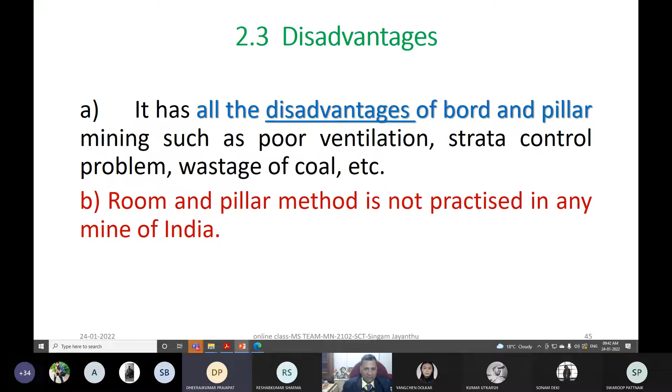So now compared to these, we have reduced OMS and reduced cost of production compared to conventional bord and pillar, as we have seen before. Now coming to the disadvantages: it has all the disadvantages of bord and pillar. We are discussing the room and pillar method, and it has similar poor ventilation because there are so many openings, strata control problems, and wastage of coal in terms of ribs and all. This room and pillar method, of course, is not being practiced anymore.

Now coming to our longwall method, which I appreciated while selecting your topics, my beloved students of underground coal mining, because the future will be only longwall mining, for the simple reason that even if you want to design a pillar, it's supposed to be so big in size that it becomes nothing but a longwall only. Very simple, right?

So this longwall method, in general, you must be knowing from the previous semester, but note it down as we will be discussing more in detail. There are basically two types of longwall mining. In India, with mechanized longwall mining, we only take up the retreat method. Otherwise, there is the advanced method of longwall mining. The case is very simple.

Already regarding this, let me ask—some of you must be knowing the basic difference between the advanced mining method in longwall and retreat longwall mining. Anybody can say in short. I am not asking this as a quiz or question, but it gives me an impression that you know something about it, and then I can explain more.

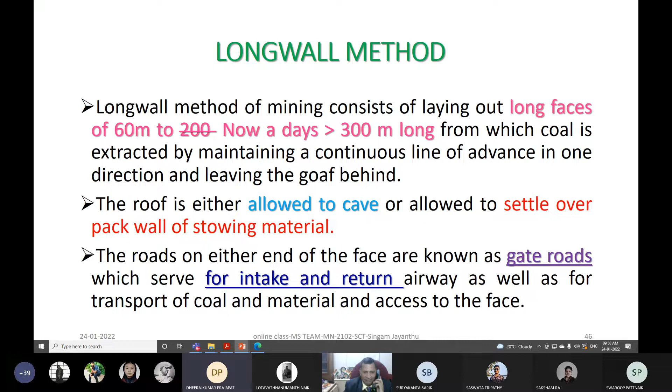Yes sir, you can say... yeah, more? Okay, don't worry. So all your students will be grateful to you who is giving voice - my voice, your phone - in this typical period of online learning teaching process.

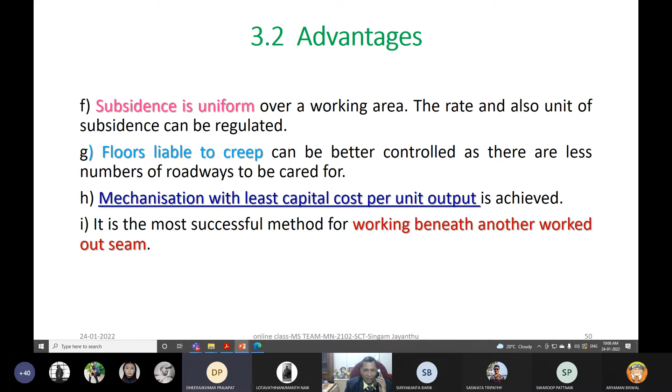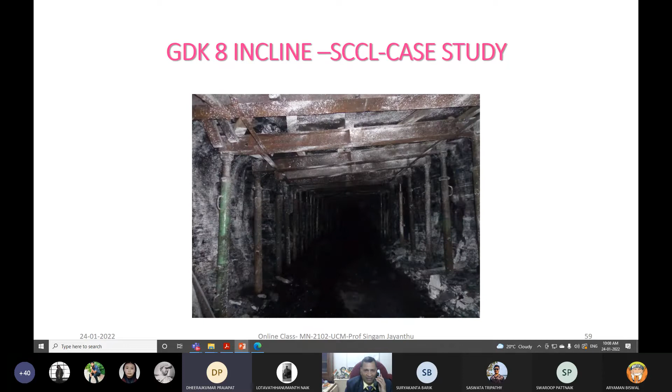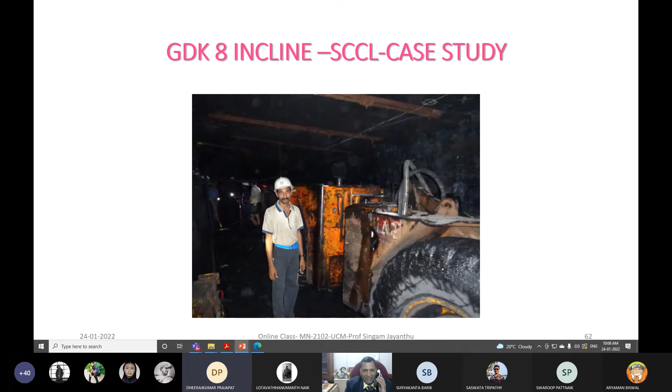We have already seen so many mine videos, and I used to take some more videos inside long wall panels and Bord pillar panels, whether it is GDK incline or blasting gallery, and how this is decided based on the performance of different panels with different machinery, LHDs, remote control LHDs, or conventional SDL with a lot of instrumentation. This is a long wall panel, long wall panel number 3D1.

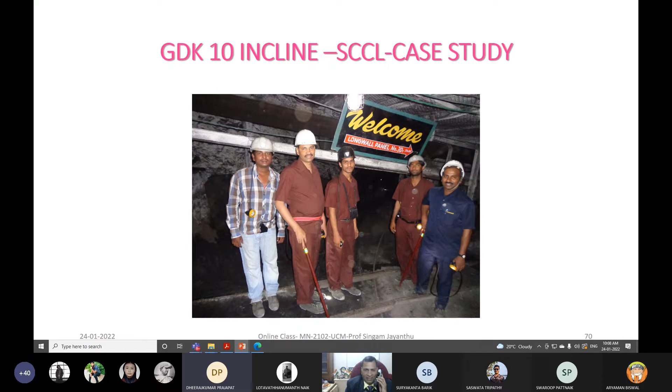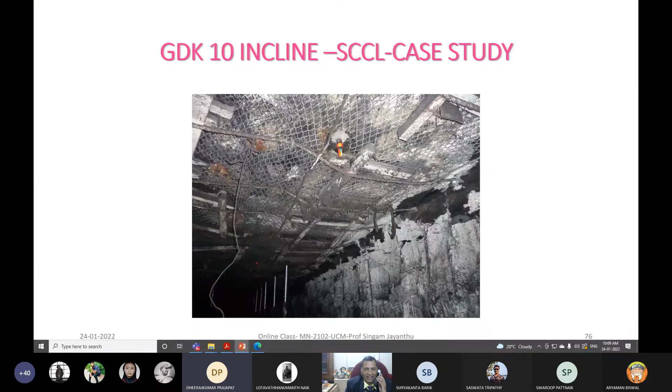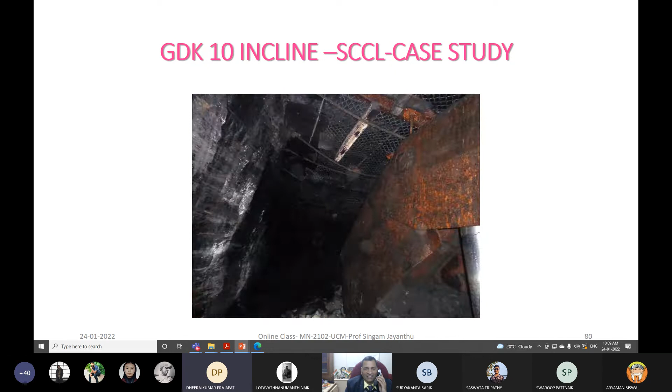You must be seeing this 3D1. Along with me is a very senior strata control engineer, Sridhar. Welcoming to long wall, all these things. Since we are discussing long wall, I am showing this, taking you to the tailgate of the long wall. Our very senior directors of mine safety, Narendra and our senior people, are here along with their general manager, measuring this. This is a long wall gate road, and all these things we have already seen.

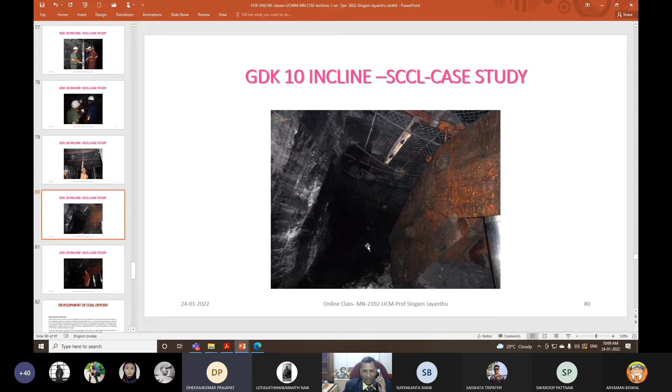So now, any doubt? Otherwise, we will move on. This is your long wall shield. Now you can see the tailgate, how it was supported. And now I am going for attendance.

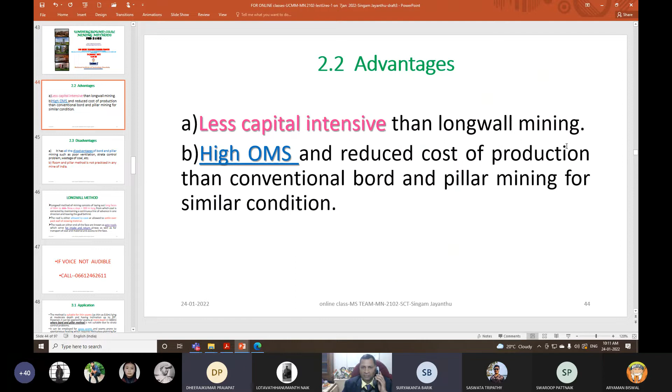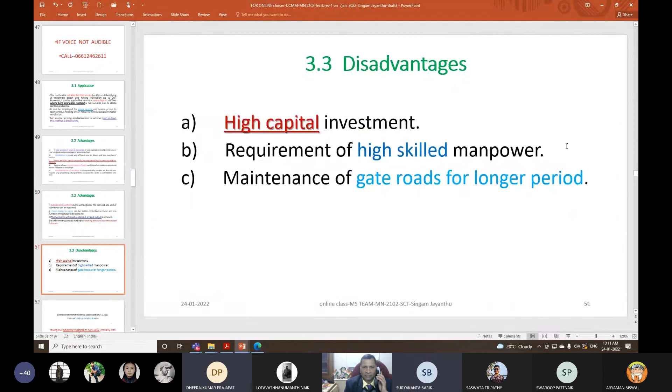Two types of long wall mining, that is retreat method and advanced long wall method. We discussed the definitions and how we distinguish the advanced long wall mining method by main gate and tailgate, where the advancing movement is done through the long wall mining. Then we discussed how, in the advancement, the cave is formed behind and the goaf is formed as the long wall mines.

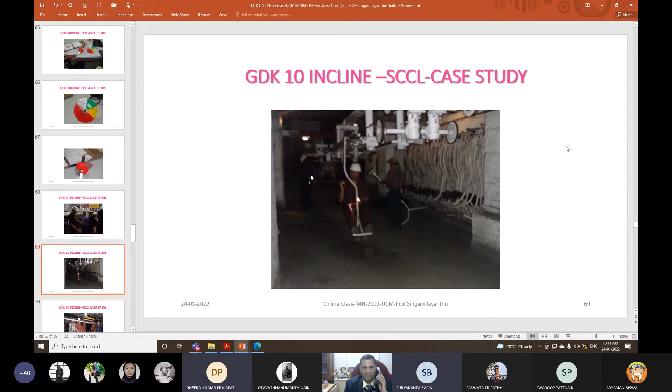Then we discussed applications, and how it can be applied for thin seams, thin seams where man cannot move — the long wall mine goes. Sir, you gave examples of plow mining and auger mining, where a person cannot move, but in long wall mining, the gates are of man's height, and through that, flaws and extractions come through. The long wall mine can be applied considering inclinations and depth where it can be worked.

Then we discussed the ventilation system, where the Bord pillar method does not have good ventilation due to its gallery system, but in long wall mining there is a main gate inlet and a return outlet through which air can move fluently, giving a good ventilation system. Sir, then after that you showed some pictures of GDK 10 incline SCCL. Yes, sir, that — very good.